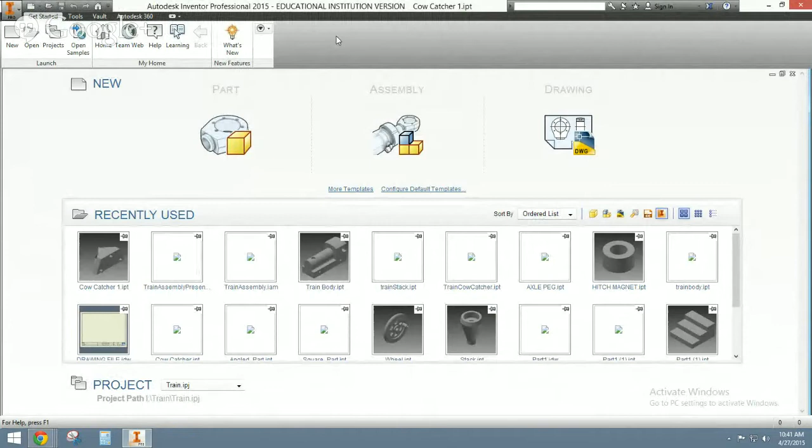So we're going to go to New, Metric, Assembly File. Remember from before, we're going to place from the Content Center. Actually, no, wrong one. Sometimes it'll say place from Content Center, but you just want Place. Notice how it changes up here in my ribbon. The first one we want to place is just going to be our train body, because everything connects to it. Place our train body.

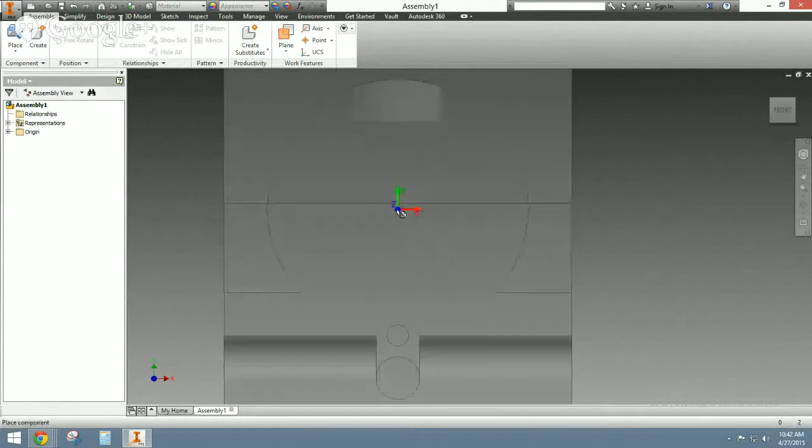Notice you can zoom in and out like this. I don't know why it gives us a train in this manner, but just click on this little button right here and we get it in the manner that we want.

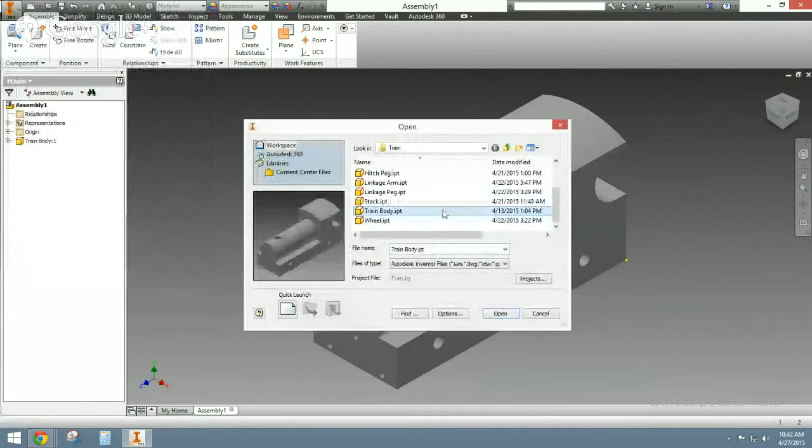If you are not in the right orientation, just go back into your part file. Go to Open, Train Body, and let's say this is not my home view, but let's say maybe this is my home view. I would need to find a way, pick my front, look at, set this as my front, pick this upper right-hand corner, and then set this as my home.

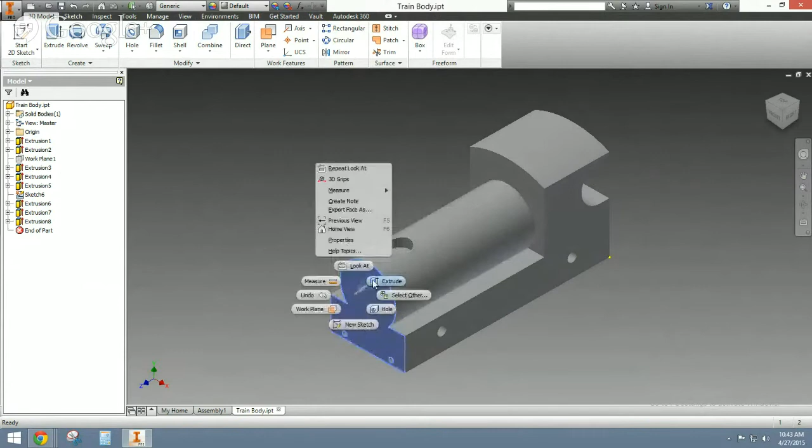So this is the view we want to put down on our assembly file. If that's not your view currently in your part file, go back and change it. Use that little look-at function. All I do is right-click on a surface I want to look at, call that one the front, then click on this little corner right here, and call that view, set current view as home, from a fixed distance.

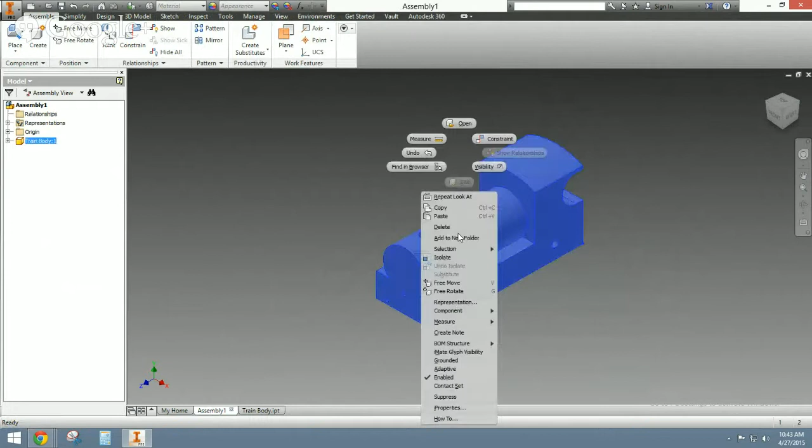Going back to our assembly file, what we want to do right here is right-click on our train body and go to Grounded, because we're going to be moving parts around and we do not want this one to move at all. We want the other parts to orient themselves to fit in here, so we don't have to play around with our viewfinder changing.

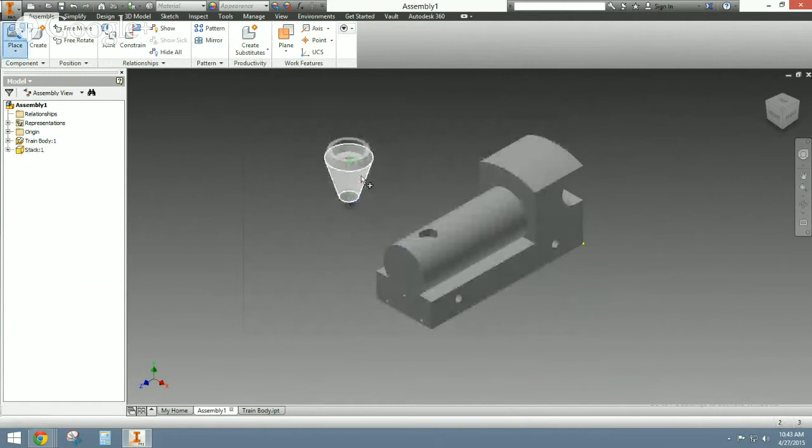I'm going to go ahead and we'll do a real simple one right away. Let's put the stack in there. I want to show you a new type of constraining, which is Insert, and Insert is great when we have holes and we want to put something in there.

So I'm going to grab Insert. I'm going to take a look at my train body, and notice the hole for the train body if I hover over it. Insert wants to find a diameter and then use that diameter, the middle of the diameter, to line up with the other middle diameter of what we want to put in it.

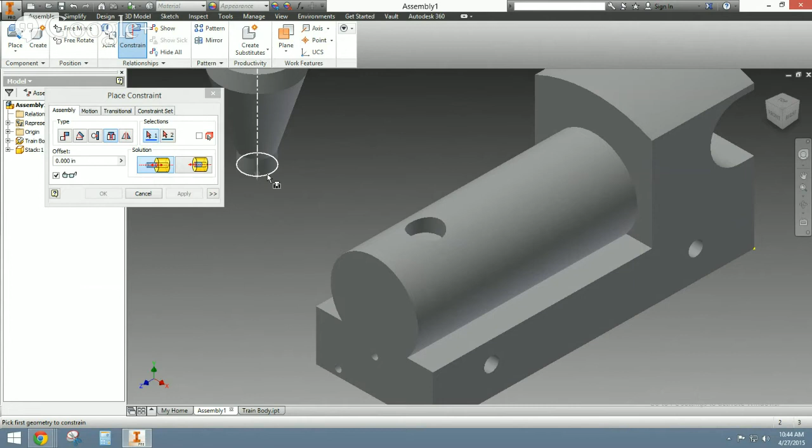So here I'm going to click the two surfaces that I want to be together. When I go to my stack, I'm going to click this surface, not this one. Very, very important. I'm going to click this surface I want to be together with that surface, and notice really, really simply it goes right down in there.

If it doesn't fit, what you need to do is change up your stack or your train body, because you may have the wrong dimensions in there. One easy way to do that is to just double-click the part itself that you think may be wrong, and notice it opens up. It's almost like a part file within your assembly file.

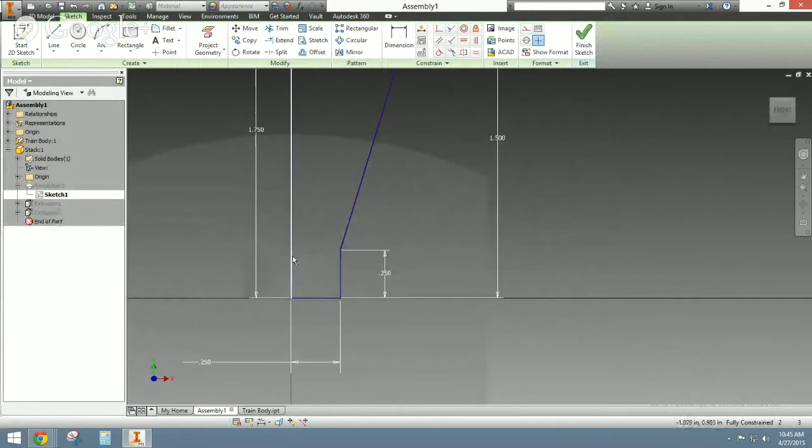So I can change up my extrusion if I want to. Let's say on my revolution, this sketch right here, maybe I had the wrong distance here, so I get the wrong sized flat portion or wrong size cylinder on the bottom. These are the things you need to look at if things aren't fitting.

So if I would change anything, I would just go back to here, finish sketch, and it should change it automatically. Then just click Return, and that gets you back into your regular assembly file.

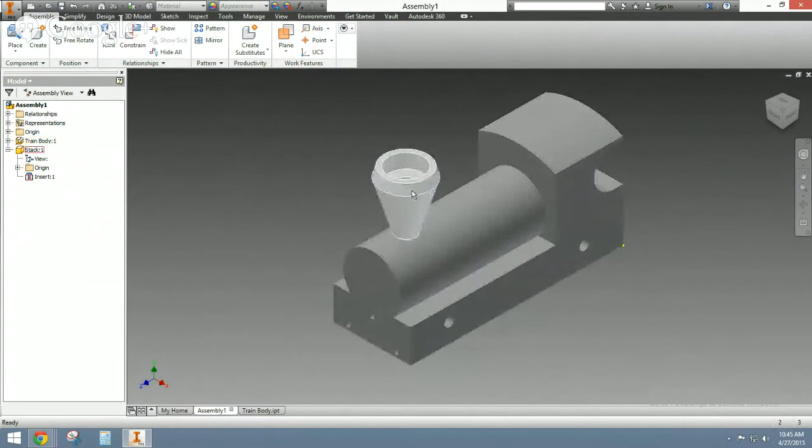Almost everything on here that you're going to put on is an insert. Just like we did this stack, you're going to do all other parts. Just make sure they're oriented correctly. Let's just do a wheel just to make sure.

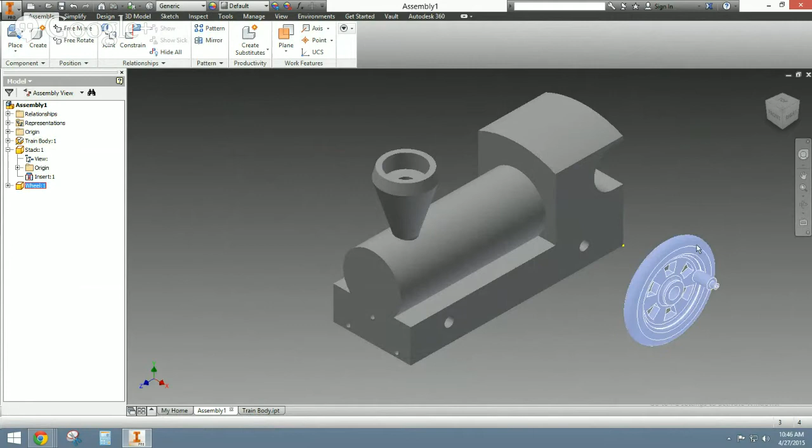Now if I place this wheel, I can place more than one of them, of course. You don't need to make 4 wheels to put on your train. You can place 4 wheels because they're just all the same. But I wouldn't want to put this wheel in this orientation on this side of my train, okay? Because it'd be facing the wrong way.

So what I would want to do is right-click, go to Free Rotate, and then just change up its orientation till it looks just about there. So I would say that's good.

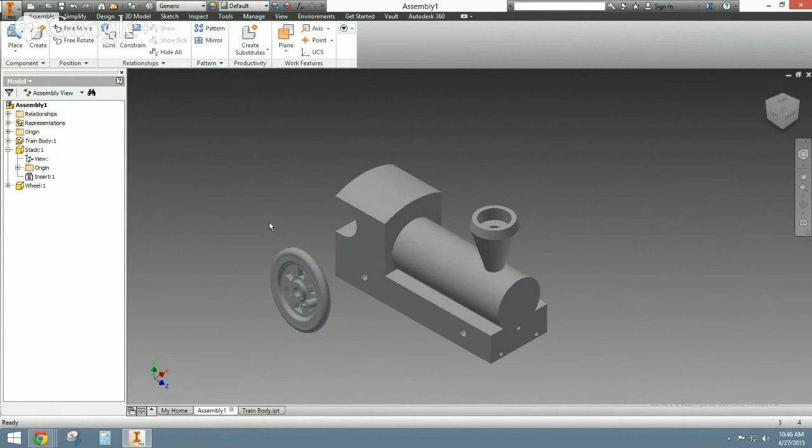And then I just go to constrain, insert. I would click on this hole because I want it to fit right up flush with the front of it. I don't want it to go into the middle on this one. This hole right here, and then I wouldn't pick this one because I don't want these two edges to meet together. What I want to meet together are this one right here.

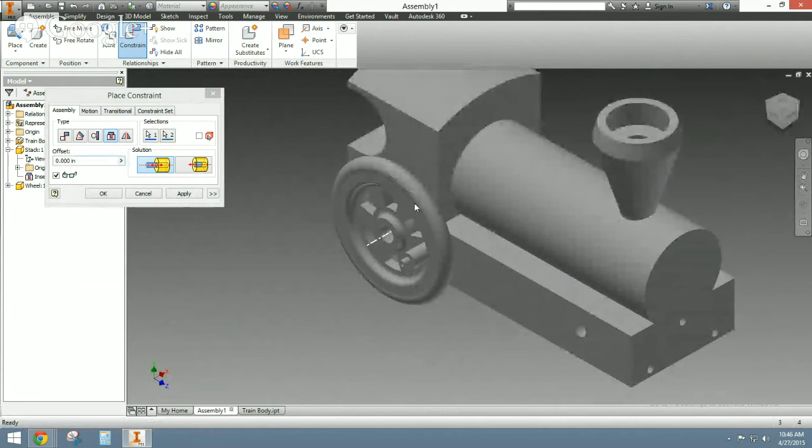So let's take a look at what we have before we say okay. If we take a look here, it's lined up right. If we look at the front, notice nothing's overlapping or anything like that. So really we look good. So I'll click apply and go cancel. Now look, we are not constrained in any one direction, so our wheels will actually move.

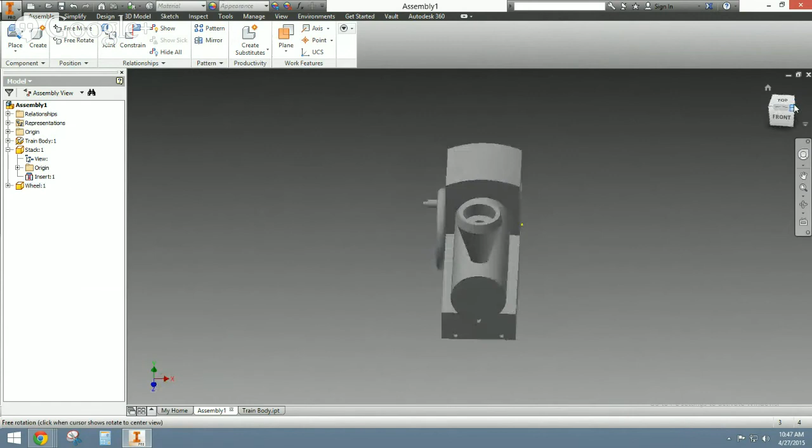One thing that may give you a problem would be your cow catcher. Now the cow catcher has 3 little pegs that fit into 3 little holes on the base. And I'm just going to rotate this around so it looks like it'll about fit. I went to move instead of rotate. So there we are, maybe right about there. I'm going to go constrain and insert again.

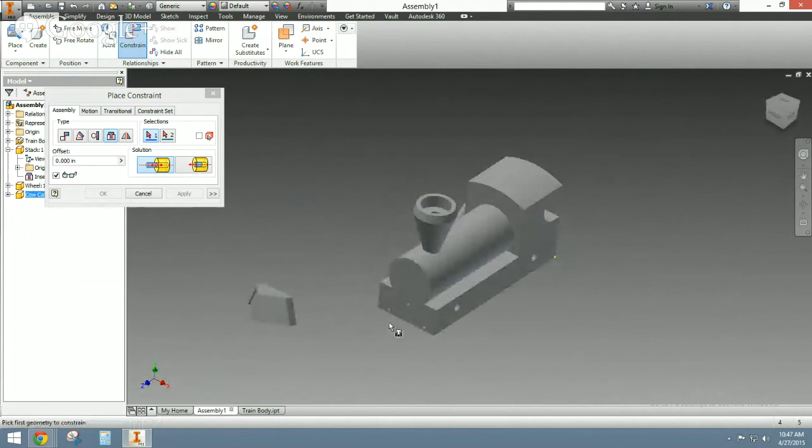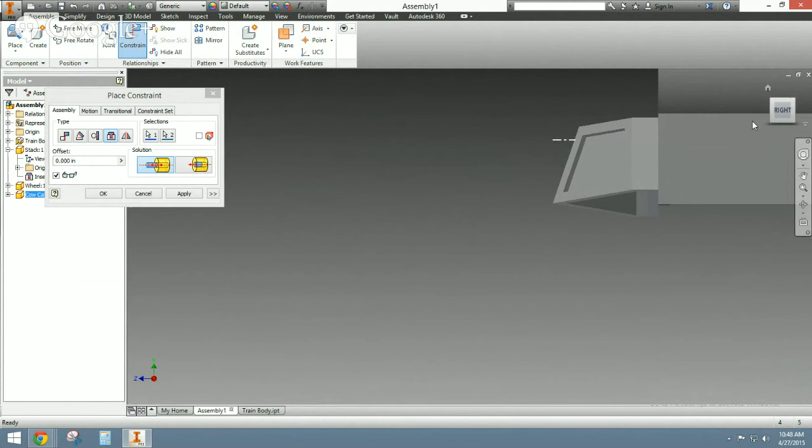All this is going to end up being is 2 separate inserts. So I'm going to pick, now I'm going to pick the back of this hole because that's where I want the back of my peg. If I'm right here, I want the back of that peg to fit on the back of the hole. So I'm going to click there, quick take a look at it, and see if I'm, now notice it's all flush, nothing's too far in or too far out.

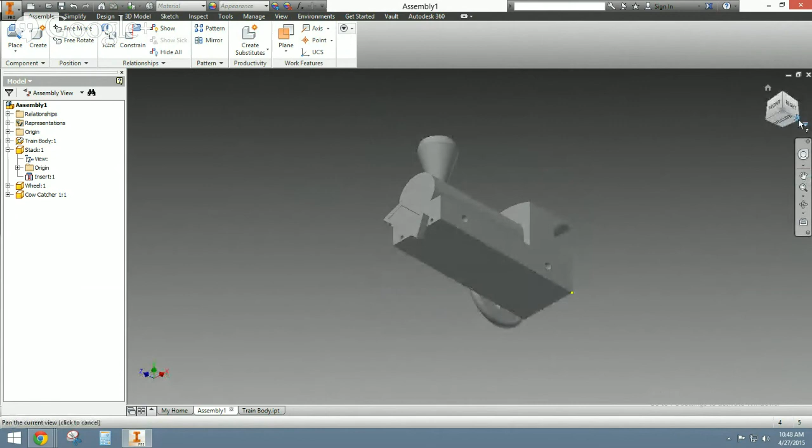So that's good. But notice what happens when I move it. We're only on that one portion. So just like our wheel, we can spin around this point. To get that to stop, I'm just going to move it right here so I can get at that back peg. Okay, so if I go around here, I can see my back peg.

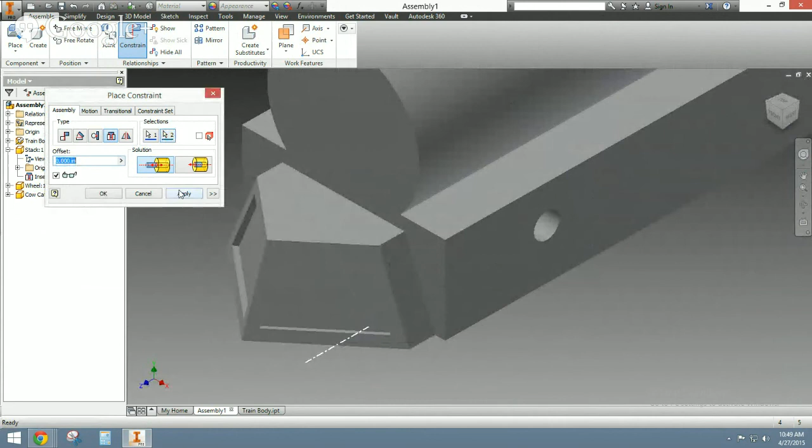I'm going to go constrain, insert. Again, this portion, the very, very, very back of my peg on there. I'm going to click on that one. I'm going to go home again. And now I can click on the back portion of the hole that I made. Click apply, and not moving at all now. Okay, so really nice. If I look at it from the side, I don't see any overlapping.

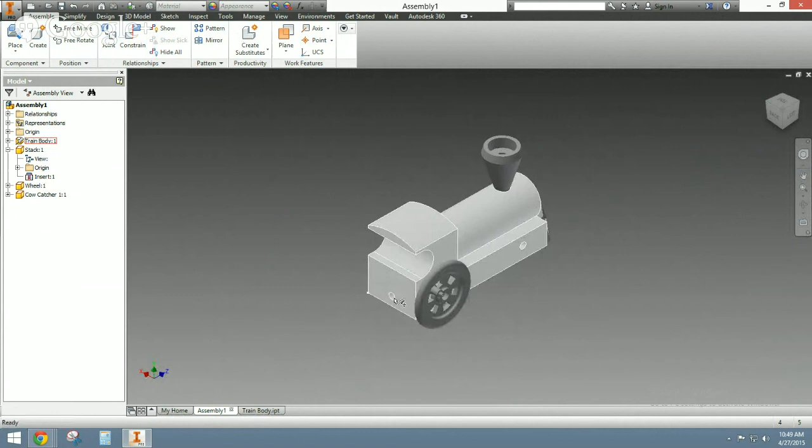So that's what you do. Again, you got a bunch of fasteners here. Do not forget about your magnet in back and your hitch magnet, sorry, the magnet fastener that's back there as well.

So again, just use insert for all these. If you're having trouble, make sure that your parts are drawn correctly, because that's the biggest portion once we start assembling. If something's not drawn correctly or to size, or if it's too big or too small, we're going to have problems assembling. So it's a good exercise to go through just to make sure that everything's drawn correctly, ready for your manufacturer. And again, have fun.